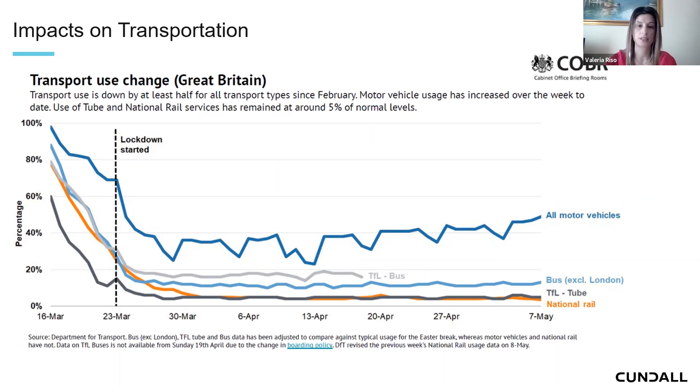Reallocating road space for cycling and walking is the best solution in the short to medium term, and I'll expand on this later, because it would enable the streetscape to be improved.

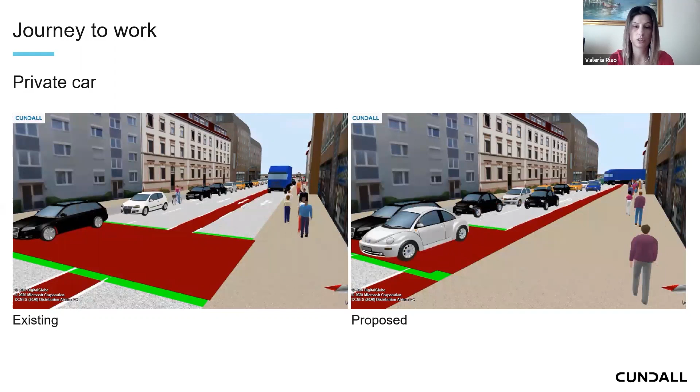The videos in these slides are from one of our projects prior to COVID-19, where the image on the left shows the existing road infrastructure, including 3 lanes plus an advisory cycle lane and a narrow pavement, while the image on the right shows the proposal, including removing the near side lane and using that space to widen the pavement.

This study demonstrated that the proposal would not significantly increase the level of existing delays already experienced by drivers traveling through the area, but it would bring a greater benefit to walking, and in the current COVID-19 scenario, would also allow social distancing.

So I think it would be crucial to monitor and review any temporary changes that are made, to assess the feasibility in the long term.

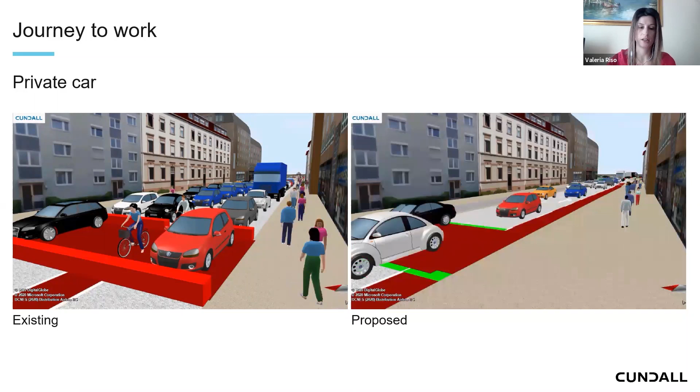So if we continue our journey to work, looking at the different modes: public transport. As I mentioned, currently we are seeing public transport use reduced by 95%.

The main impact on social distancing on public transport would be, I think, on capacity, space, and time. Capacity, because the need for social distancing would obviously reduce the vehicle's capacity.

For instance, in London, the total carrying capacity of the tube could be reduced to between 13 to 20% of the pre-crisis levels, even with 100% of trains running. And the carriage capacity of double-decker buses could be reduced from 85 passengers to about 15.

Therefore, more services will need to be provided, alongside providing services catering only for demand from certain stops along the same route, to give passengers located, for example, towards the end of a route, a chance to use the service.

Impact on space, because bus stops, train and tube platforms would be impacted by the space needed for queuing for services, as well as providing enough space for others to safely walk past while social distancing.

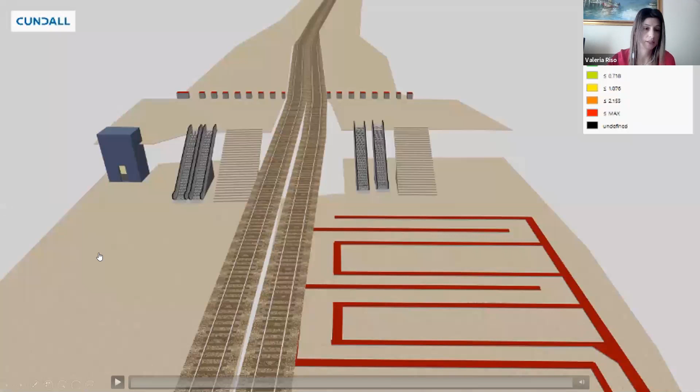Some short to medium term solutions would include the use of screens to increase capacity within vehicles, space allocation aimed at increasing capacity within the space available, one-way circulation, booking-only services, also mobile apps that could give live information on existing queues at stops or advise on a quieter time to travel, the removal of gates, and the introduction of online payment only.

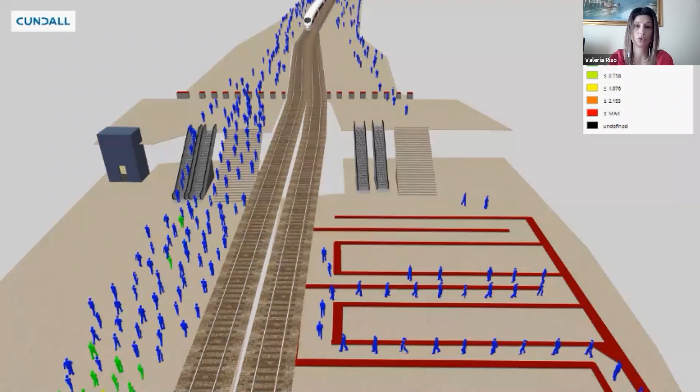Staggering daily start and finish timing for activities such as work, and or staggering the need for traveling to work to days or weeks on and weeks off, etc.

Going back to the video running on this slide, this is again from one of our models, where we have assessed a train station scenario and the impact of social distancing with and without space allocation for queuing, to identify the high density walkways and pinch points.

In the space on the left, people distance themselves wherever possible, while in the space to the right, people always obey the 2 meters distance rule. People are also color-coded based on their experienced density, which indicates how distant people are from each other, with blue indicating that the 2 meters distance rule is respected, and anything different from blue is when this rule is breached, with congestion starting from the color yellow.

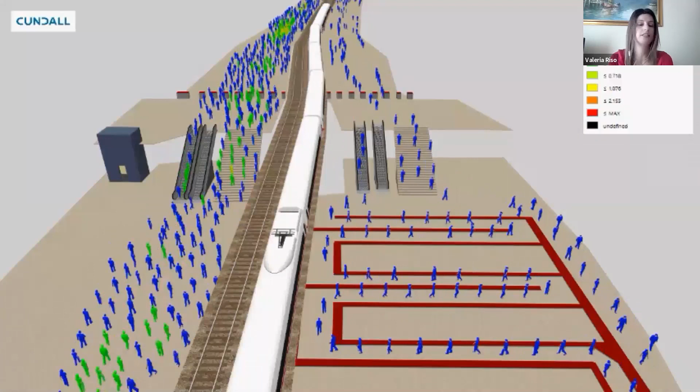So we saw that it's not possible to maintain social distancing in open spaces unless people are guided to follow a specific path or queue. With free movement, on the left in the video, the high density spaces would be the stairs, with pinch points happening at the entrance, at the gates, and at the platforms while boarding the train.

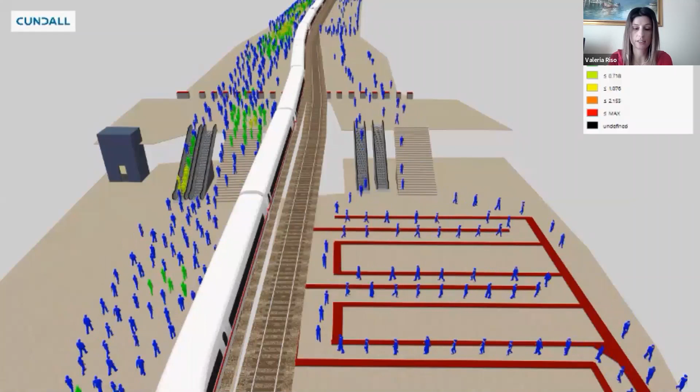Within the queue scenario, on the right in the video, social distance has been respected. However, the access rate to the station is much lower compared to the free movement scenario, which implies that people must be able to queue outside the station. It also shows that fewer people are able to reach the platform and board the train, which impacts train times.

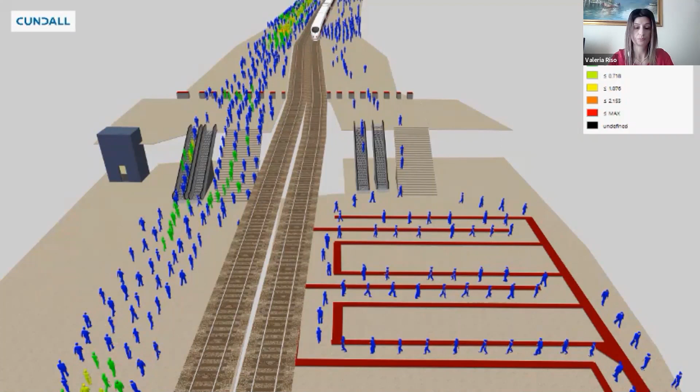Currently there has been a high increase in walking and cycling, and in the short term this trend is forecasted to be maintained. As mentioned, we have seen a number of schemes and initiatives launched by different cities in different countries. I'm only bringing a few examples.

In Berlin, cycle lanes have been extended, or new ones created, to balance the reduction in public transport services, with road space taken from motorized lanes.

In Paris, the mayor announced that 50 kilometers of lanes normally used by cars would be reserved for bicycles following the end of lockdown, with an additional 30 streets made pedestrian only, in particular around schools.

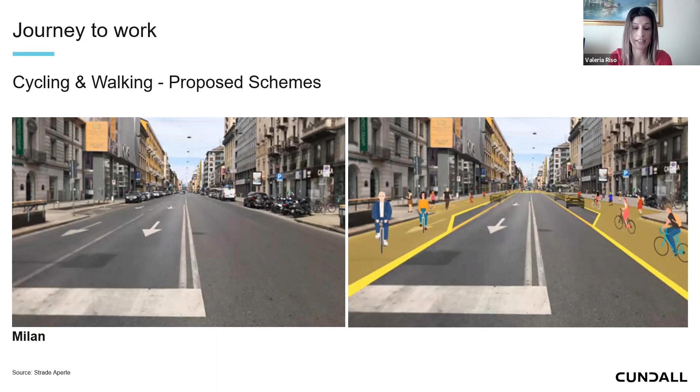In Milan, it was announced that 35 kilometers of streets will be transformed over the summer, with an experimental citywide expansion of cycling and walking space to protect people during their current stage 2, where COVID-19 restrictions have already been lifted.

In the UK, in England in particular, plans to promote active transport were launched on the 9th of May, including pop-up bike lanes with protected space for cycling, wider pavements, safer junctions, and cycle and bus-only corridors to be created within weeks. The plan also included e-scooter trials brought forward from next year to next month, using technology to help ease overcrowding on public transport.

In London, a new street space plan was also launched by the mayor, including pavement widening, temporary cycle lanes, and in particular a new cycle route above tube routes.

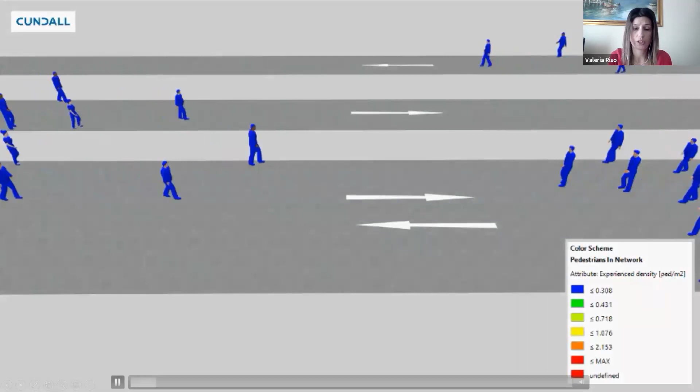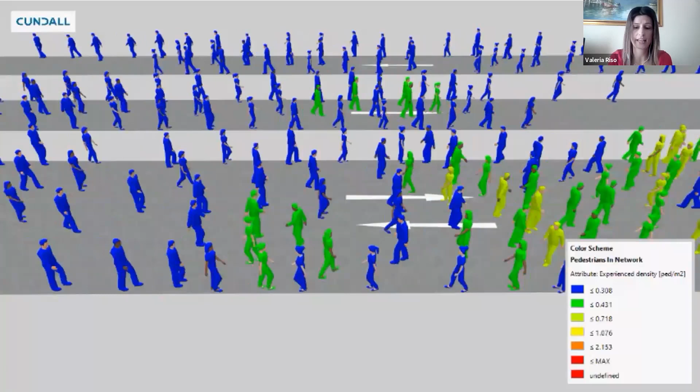With regard to walking in particular, in the model shown in this video we have assessed the impact of social distancing on walking behavior. We considered two one-way sections, shown at the back of the video, and one two-way section, which is twice as wide as the one-way sections and includes the sum of the people from the two one-way sections.

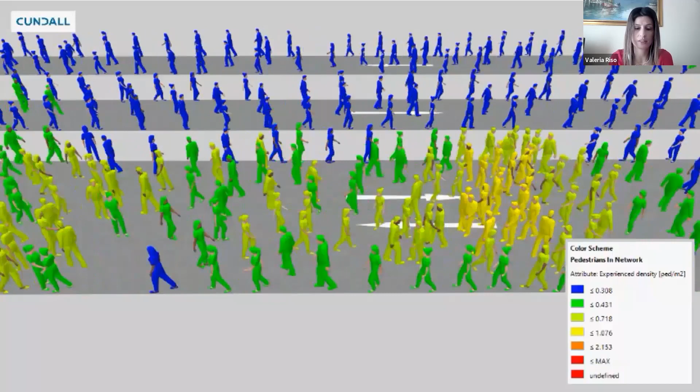In short, the assessment indicated that while some initial and only local congestion would be experienced within the one-way section, the movement of people settles to a situation where everyone walks at a distance of 2 meters. The two-way section, however, experiences high congestion and breach of the 2 meter distance rule, which extends for a much longer period of time compared to the one-way section.

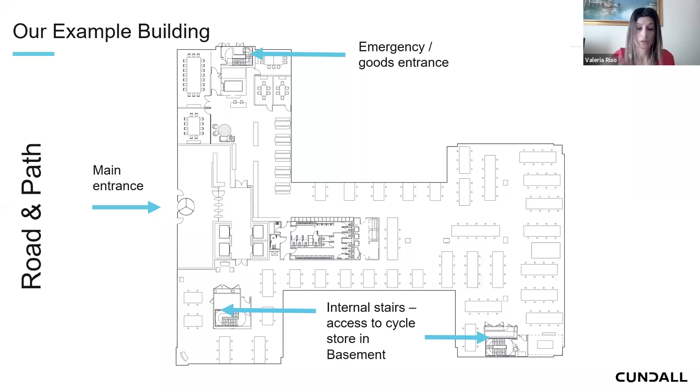After assessing how our journey back to the office building could look like, I will hand it over to Graham, who will look at the impacts within the office building.

Thanks, Valeria. So every building's different, and in order to produce this webinar today we needed to base it around something to assist with our thought processes and considerations regarding a specific building. So we've chosen this example building. It's a fairly typical multi-tenanted office building.

It's got a single main reception and entrance at the ground floor, and offices provided at ground floor and on the 5 floors above.

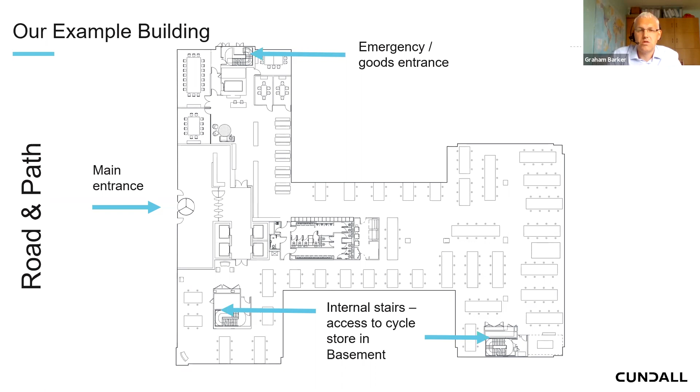We see here the main building entrance with the usual route through the revolving door, through the speed gates, and into the lift lobby. Lifts are the primary route to all above-ground floors. There are stairs within the building, but these are very much back of house. There's no direct route from the main lobby to those stairs, and prior to the current crisis those stairs were not used for people movement within the building.

The speed gates are the secure line, and like many buildings, the lifts have been upgraded in recent years to a destination control system to improve lift service in an age of increased occupation density. Over the last 15-20 years, the population and density of offices has become greater, and they're becoming more reliant on lifts to get people to their offices and desks reliably. That's going to have a negative impact as we move forward because of the density we've put into our office spaces.

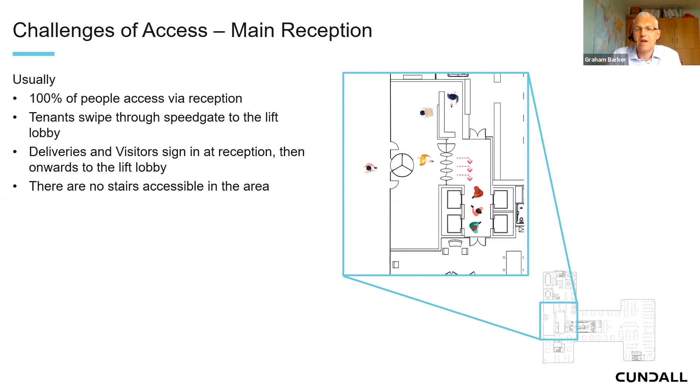Here we see the usual route into the building pre-Covid-19, where people are passed through the speed gates and then congregate in the lift lobby awaiting their lift.

So when thinking about the reoccupation of the building, some of the things we're likely to need to consider are access, building and tenant security, and fire doors. Leaving doors open might be one strategy, but can we do so? Coupled with that concept of leaving doors open, the internal environment regulation - what's that going to do to heat, noise, air quality? Obviously there's also the segregation and social distancing requirements and the potential for transfer of virus via contact surfaces.

In today's webinar, we're going to focus on the people side of accessing the building. But the lifts and escalators obviously need to be operational prior to building occupation. It's not the focus of this webinar, but there is a blog on it at cundallconversations.com if you want further guidance on getting your lifts and escalators up and running, ready for people to approach your building.

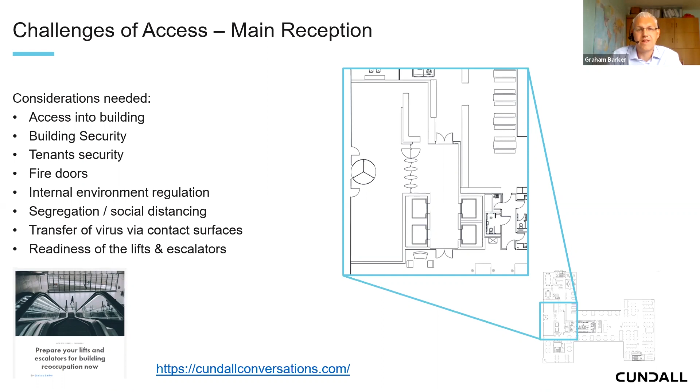Just picking up on escalators, we saw them in Valeria's graphic earlier at the station. Our example building doesn't have any escalators, but many buildings do. As we saw in that graphic, the constant speed of an escalator will maintain social distancing if people are distanced when they board.

So as long as the queue is managed to the escalator and people are boarding at currently a 2 meter distance in the UK, that will be maintained throughout their journey on the escalator, as long as people don't accelerate. A couple of key things to consider.

Don't attach anything to escalator steps or handrails without special advice and the involvement of your maintenance provider. The last thing we want to do is put tape or anything of that nature on an escalator to promote social distancing, because it's likely to damage it.

The handrail cleaning regime is the primary consideration on escalators, and really there probably needs to be a risk assessment carried out to assess the use of the escalator versus alternative means, if there are any available.

What we absolutely shouldn't do is suggest to people that they don't hold the escalator handrail. There'll be a potential aversion to making contact with the handrail, but that introduces quite significant health and safety issues - people falling down escalators is unfortunately a regular occurrence where they don't hold the handrail, and it leads to some very nasty physical injuries.

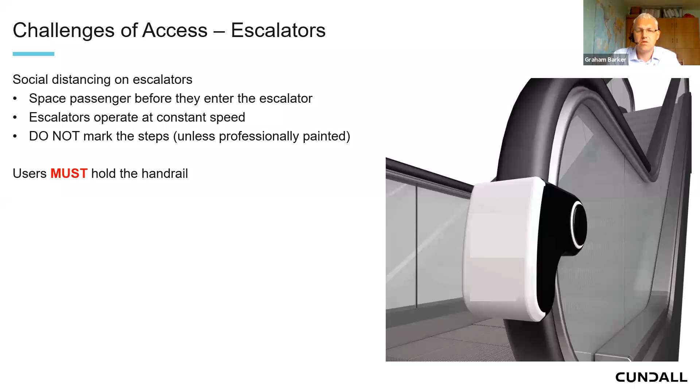Final thing to consider on escalators is that static escalators also shouldn't be used as staircases. Again, it needs to be part of that risk assessment about what is the best route into the building.

There's lots of potentially miracle products on the market - you really need to investigate them. I'm sure not just in our field, but across all areas of our lives at the minute, people are trying to promote their products as the best thing since sliced bread that solve all of our world problems. Do the detailed analysis and read the label, because not everything is as valuable as the sales blurb would suggest.

Coming back to our example building, our building's got 4 lifts, 1,250 kilos or 16-person lifts. As I'm sure you've probably noticed yourself, if it says 16 people, it probably doesn't look like it'll fit 16 people in it, and that isn't the realistic number of people the lift could carry. Lift occupancy is calculated based on the area taken by a person, so in this case a 16-person lift would be expected to take a maximum of 10 people.

Passenger arrival in the morning would typically be spread over around an hour, with a peak in the middle. These charts show that under normal circumstances, the lift system is well designed and handles the traffic with minimal waiting times and short queues of people awaiting the next lift. Even at peak time, we've got no more than 16 people waiting for a lift.

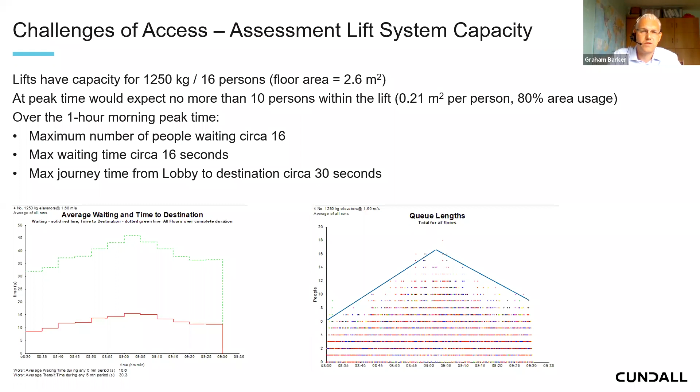In Sunday's broadcast, Boris Johnson in the UK talked about a 3-step plan, with step 3 being the return of hospitality at the earliest date of the 1st of July. During all 3 steps, social distancing rules would need to be maintained and enforced. I suspect we'll see further guidance in coming days, but some level of social distancing will be needed in lifts, with suitable signage, potentially indicating which direction people should be facing and what PPE they may need to be wearing.

Let's look at a couple of different scenarios to see what the impact could be based on doing nothing. We'll keep accessing our building through the usual route and just apply the social distancing measures. A 2-meter social distancing rule will, in most cases, mean only 1 person traveling in a lift.

If we operate as before, with full building occupation and access via the lifts, we'll develop a queue of around 650 people in the morning. In our 2-meter spaced queue, that's now 1.3 kilometers long, which might be a challenge in terms of locating it on the exterior of the building. For people arriving around 9:30, it'll be gone 2 o'clock in the afternoon before they actually get through the lift system and up to their desk.

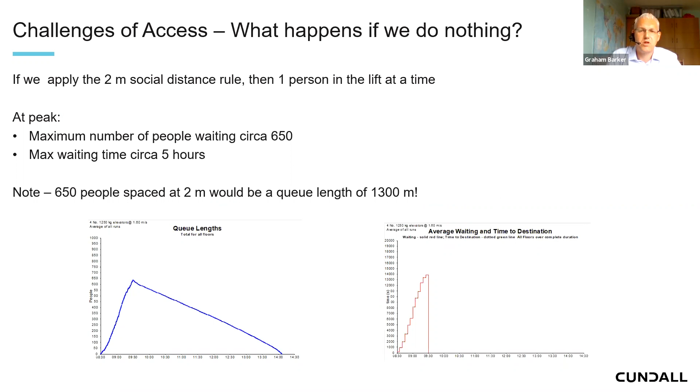Obviously this isn't a realistic option, but it helps us understand the size of the problem we face.

Perhaps with the use of PPE, the social distancing measures could be relaxed in lifts, and we could have 4 people in a lift, 1 in each corner. This helps us move people into the building more quickly, but it still results in long queues and queuing times. We still get a queue of around 300 people at peak time, and a waiting time of around 40 minutes just to access the building.

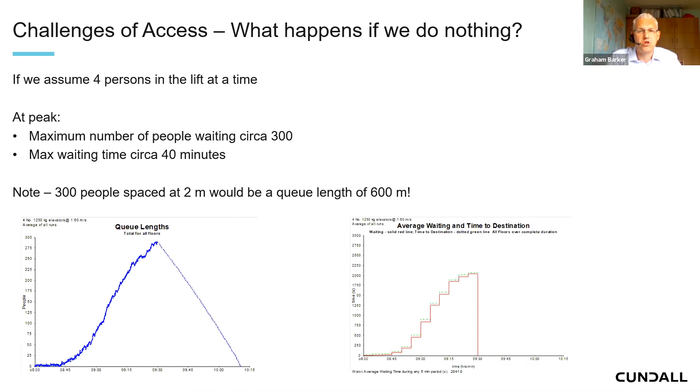So we need to think and act differently. Can the stairs be used? That's going to be the fundamental question most buildings will be looking at. What volume of people need to use the lifts, and what volume could use the stairs? Many of us use the lifts out of building arrangement or convenience, but how many of us actually need to use the lifts? How many could take the stairs?

Could we reduce the building occupancy? Could we spread the peak arrival and exit times through staggered start times or shifts? Each building is different and will need to be assessed to consider what works for them.

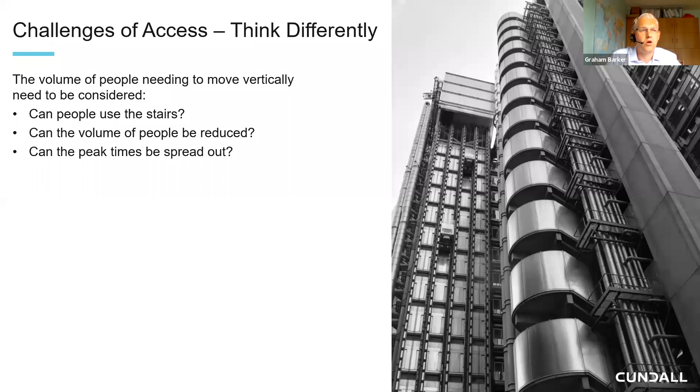I think the added complication in our example building, as a multi-tenanted building, is the need not only to develop your own business plans, but to coordinate with the other businesses within your building to develop an overall building strategy. Because there's no point one tenant coming up with the best plan in the world if another tenant is just planning for everybody to turn up at 9 o'clock and hope for the best.

Looking again at our example building, we need as many people as possible to use the stairs, and there is an emergency stair accessible from the ground floor. Could we use a second stair for downward travel? We've got a challenge in this building in that the other stairs don't exit at ground level, so perhaps we'd need to manage a one-way system on a single staircase.

Both these things need to be assessed and management processes put in place, and queues are likely to develop at the base of the stairs, which will again need to be managed.

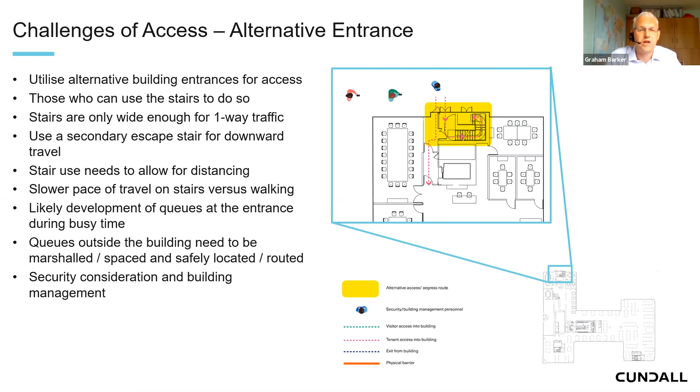Building and individual tenant security and access controls are unlikely to be prepared for accessing via this back-of-house staircase, so security considerations also need to be considered. Are we going to have some kind of security guard checking in, or maybe even a list of names to be ticked off at that back-of-house door?

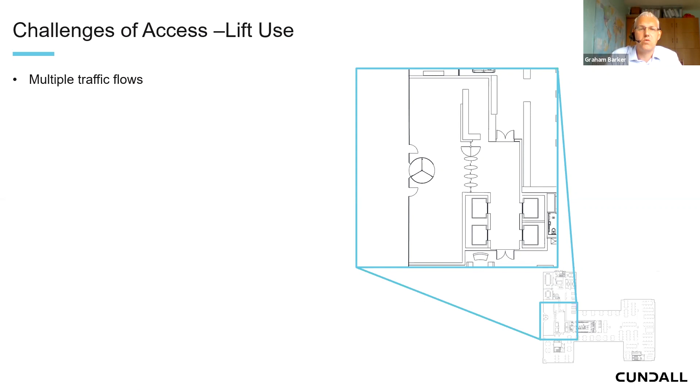When we come back to the lift lobby, there will still be people that need to use the lifts, and we need to consider the different traffic flows. We're likely to have incoming tenants who need a route that allows a queue to form with some segregation from people exiting. There's also the people exiting the building, and provisions needed for deliveries and visitors.

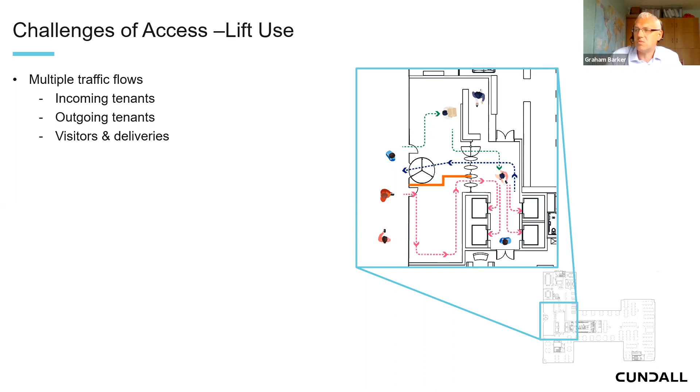One question many businesses will be looking at is: can I prioritize my staff and perhaps limit my deliveries and visitors? Building management staff will be needed to marshal the different flows and likely control building security, because I personally think it's going to be impractical to continue using the speed gates where you've got queues effectively forming through them.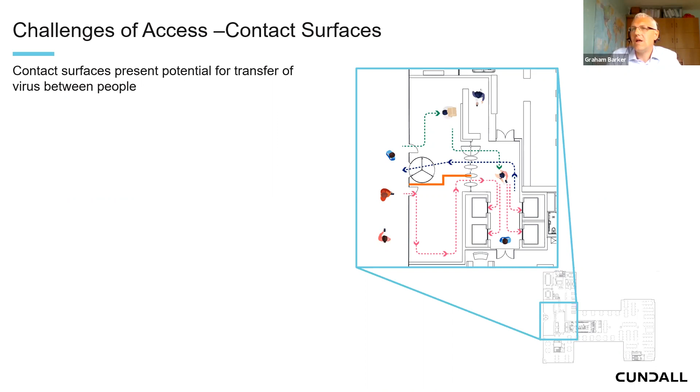So now we've sorted out our access routes and flow of people, we also need to think about contact surfaces. There are lots of contact surfaces on the way to our workplaces. I won't go through them all.

Fundamentally, we need to minimize contact surfaces. Can doors be wedged open so that people don't need to touch them? Can we provide hand cleaning facilities, hand sanitizer? But I think the location of those facilities is going to be absolutely key.

In our graphic here, we've placed a hand sanitizer station at the entry door to the building. It's likely that whilst people were stood in the queue, they'd immediately recontaminate their hands by getting their phones out of the pockets to check their emails, Facebook, etc.

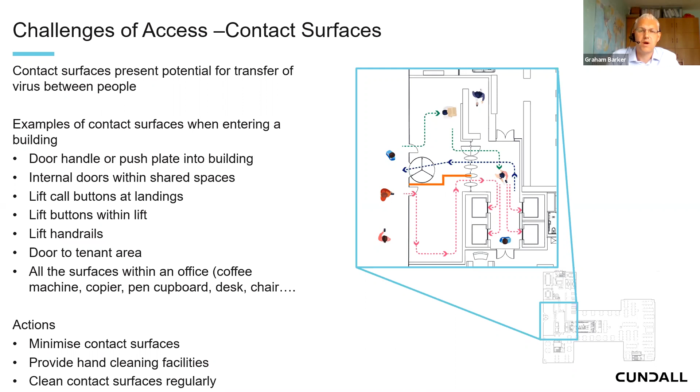And aside from individual hand sanitization and cleaning, the whole building needs to be supported by suitable cleaning regimes, particularly for high contact surfaces.

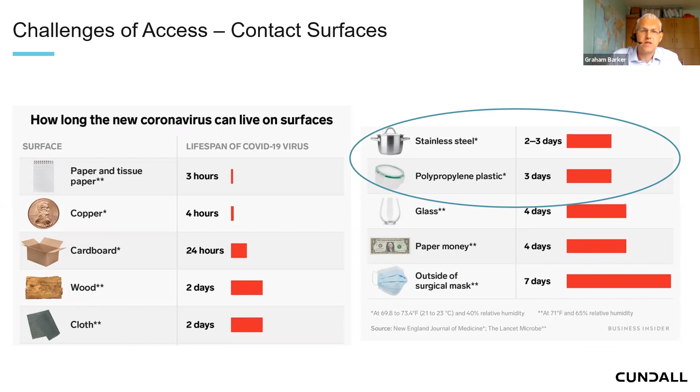So coming back to the lifts, typically lift surfaces are stainless steel and plastic, and have around about a 2 to 3 day stay-alive period for the virus if uncleaned.

And so each building is going to need to be individually assessed. The use of an implement to contact surfaces is likely to need to be disposable. Any implement that you use to press buttons, in this example, would, after several uses, become dirty, and then it would just be transferring the virus in a similar way to that your hand would.

Wherever possible, we need to look to remove contact surfaces. And perhaps a single member of building staff operating lift buttons, opening doors, would enable building users to pass through without contacting and remove the possibility of transfer between people.

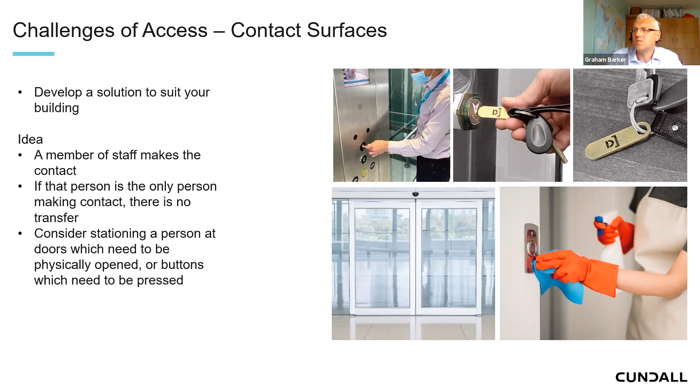So a little bit of a lift education for those that don't know. There are two main types of lift controls. Conventional: you press the button on the landing, the lift arrives, you get in the lift and you press the button to tell it where you want to go.

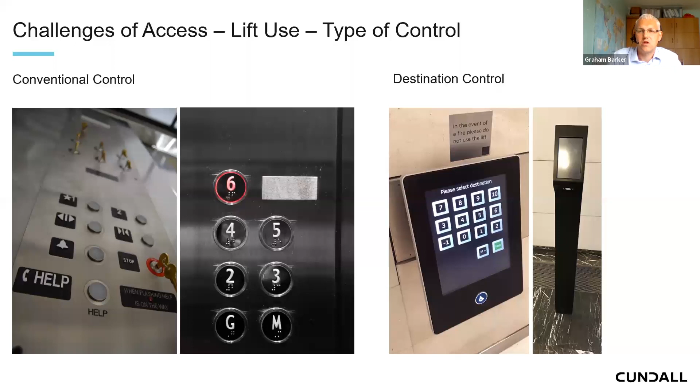So on a conventional lift, we've got two contact points effectively. We need to press the button in the lobby, we need to press the button in the car. The alternative would be to get the security or building management team to do the lift operations. So they press the call button in the lobby, lift arrives, they check the lift's empty. We don't want people accessing lifts that have already got people in them before they've had a chance to leave.

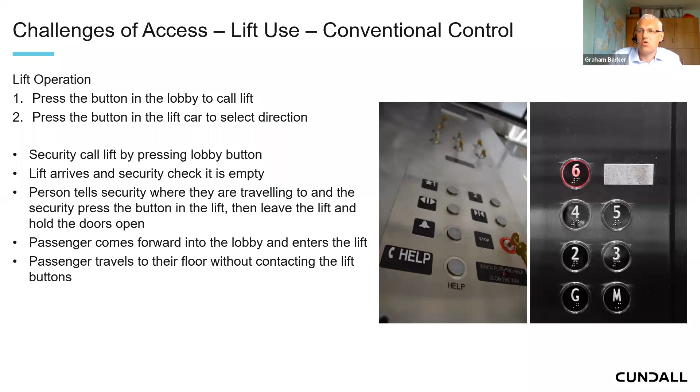The security person presses the button in the lift car to indicate where the occupier is going to. And then that person comes forward into the lobby, enters the lift, and travels to their floor without needing to contact any of the lift buttons. The other facility that gives is that it enables the security team to manually manage the number of passengers entering the lift and effectively to marshal the whole operation.

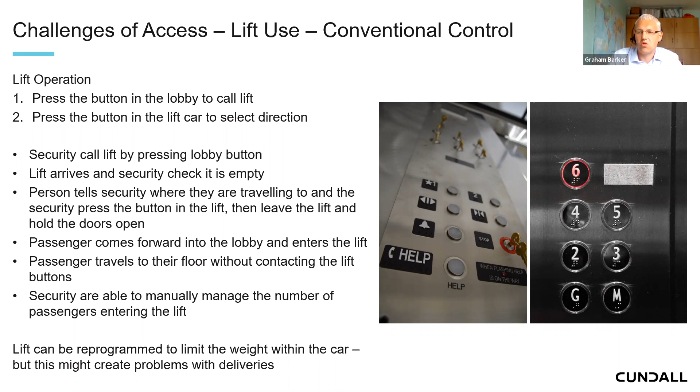It is possible to make some reprogramming to the lift to adjust weight limits. That needs to be considered with your lift provider, and also in regard to any deliveries, because that may affect your delivery strategy.

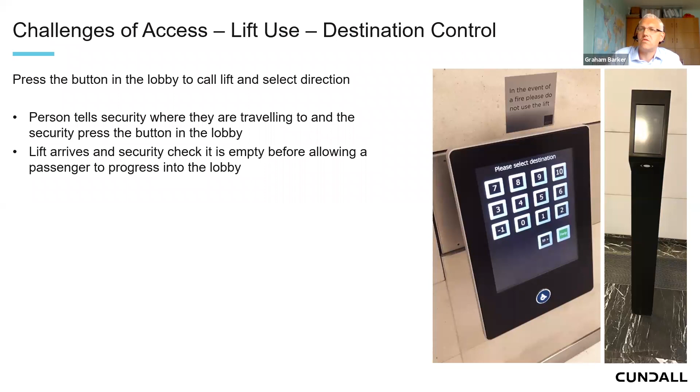Destination control system - simpler scenario, because we've just got the single contact point. The floor selection's made at the lobby before entering the lift. So again, security would, in this case, press the button for the user, again would check that the lift is empty, passenger enters the lift, travels to their floor.

The destination control system does allow much greater control over how the lifts will operate, and can even be programmed to manage the number of people allowed to travel in the lifts in order to achieve the social distancing requirements. So again, if you've got a destination control system within your building, you've probably got the opportunity to put more hard-coded solutions in place regarding your lifts with the assistance of your lift company.

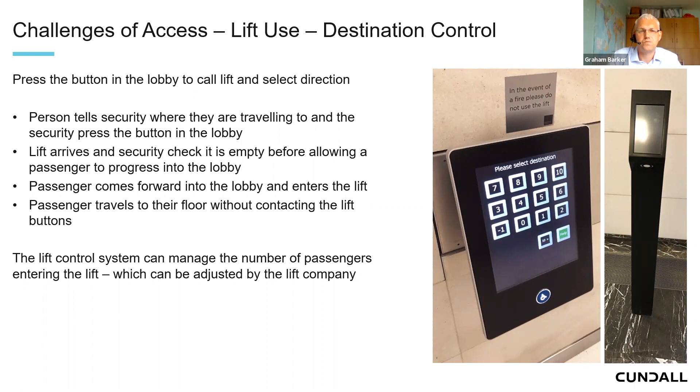It's important to consider the complete building operation over the full working day. Some buildings might have shared facilities between tenants, toilets, kitchens. We also need to think about people perhaps leaving the building at lunch breaks, leaving at the end of the day.

I don't think any of us really know how long some of these measures may remain in place, and it might be worth considering making some more permanent building modifications. But it's important to assess each building individually, the occupancy mix, and how the building can operate.

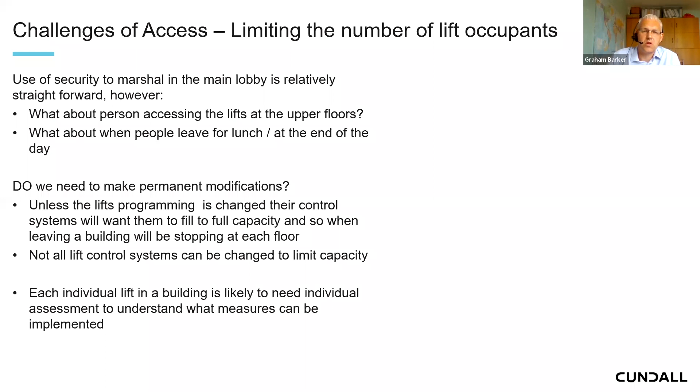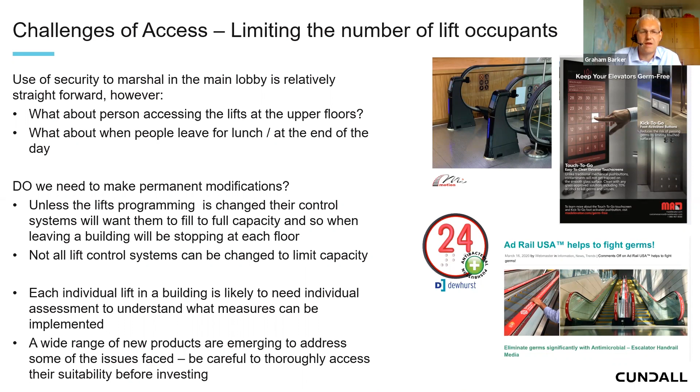So over to Valeria. Yeah, so just to conclude this webinar, this final model shows how we can assess the impacts of social distancing on accessing a building. Okay, again, apologies for the resolutions.

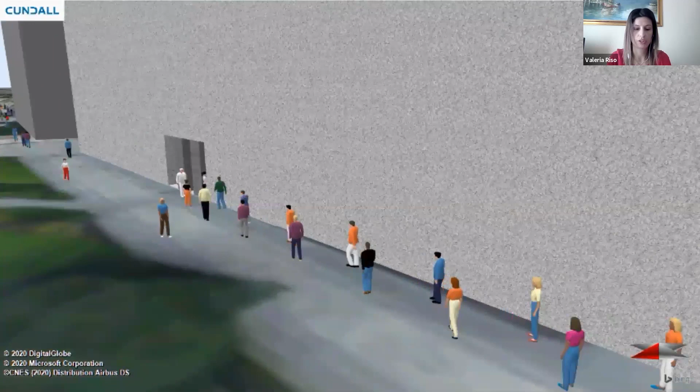So we have used the building in question that Graham was talking about. So first we have assessed both the indoor and outdoor spaces and established circulation paths to control movement flows and to ensure the 2 meters distance can be respected.

Then we have separated in and out flows and assigned dedicated spaces to each movement, including dedicated doors and dedicated lifts. For instance, we've assumed that the lift to the left are used for taking people down only, and the lift to the right are used for taking people up only.

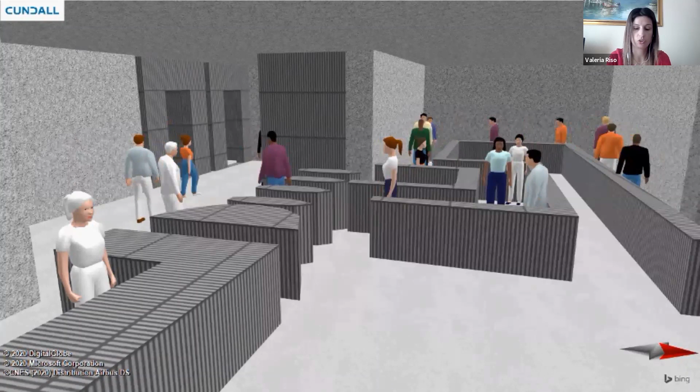So basically, given predetermined inputs, such as the number of people arriving, their paths to the building, and their arrival time distribution, the use of the model would allow us to identify, above all, the extent of the queue outside of the building, the timing for entering the building from joining the queue, or basically the time spent on each area of the model, the impact of a one-way system, the impact of a two-way system, high density areas, the pinch points within each area of the model, how successful a strategy could be and what improvements are needed. And basically, all in all, it would allow assessing any strategy before a live implementation.

So just to leave you with some final thoughts. With regard to transportation, as we have seen, social distancing has an impact on space, time, and capacity. So therefore, any solution would need to be tailored to the particular case considered, while we will need to design for allowing social distancing, including physical measures such as widening footways, providing more cycle lanes, identifying space for queuing, and also space for parking our bicycles to cater for the higher demand.

We'll also need to consider how the new travel habits, including walking and cycling more, can help reduce the demand on public transport, and how the use of home working, staggering of activities, introduction of shifts can help reduce or spread the demand for movement over a longer period of time to increase the capacity of indoor and outdoor spaces needing to comply with social distancing.

Thanks. And I think fundamentally every building is different, every building's operation is different. Just picking up on what Valeria said there about cycles and the increased volume of cycling, over the last 15, 20 years, we've seen cycle storage provisions go from pretty much zero to, even in the best, highest spec buildings that are being constructed today, we're seeing kind of a 10% allowance for cycle storage.